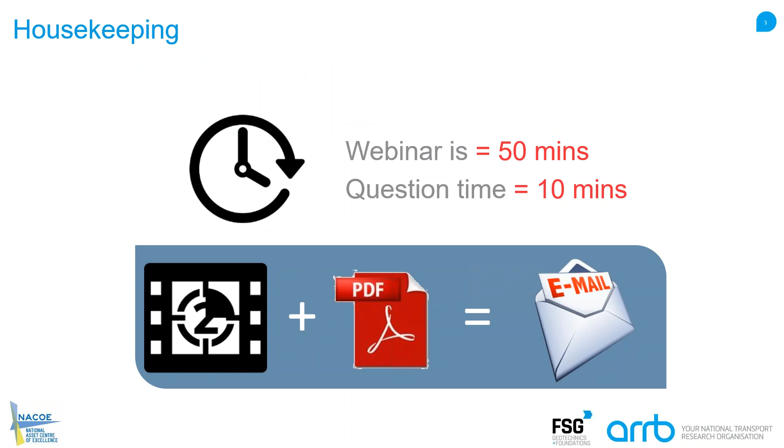Our presenters today are Dr. Jeffrey Lee, Dr. Bert Look, and Dr. David Lacey. Dr. Jeffrey Lee has 18 years engineering experience with a focus on pavement and geotechnical engineering. He is currently a principal pavement engineer at the Australian Road Research Board, responsible for delivering and managing research projects under the National Asset Centre of Excellence, NACOE program.

Dr. Bert Look has 35 years professional engineering experience, with over 32 years specialization in geotechnics. Bert is 2014's Queensland Professional Engineer of the Year, and has published 3 geotechnical engineering books and over 70 technical publications. Dr. David Lacey has degrees in both geophysics and civil engineering. His part-time PhD candidature investigated appropriate testing methods to assess in situ material parameters of residual soil profiles. David was 2016 Engineers Australia Young Professional Engineer of the Year.

So welcome Jeffrey, Bert and David. And before we get started, we wanted to find out about our audience, so I'll launch the poll. Welcome to you all, how are you all? Very well, thank you. Excellent, thank you, great to be here, thanks.

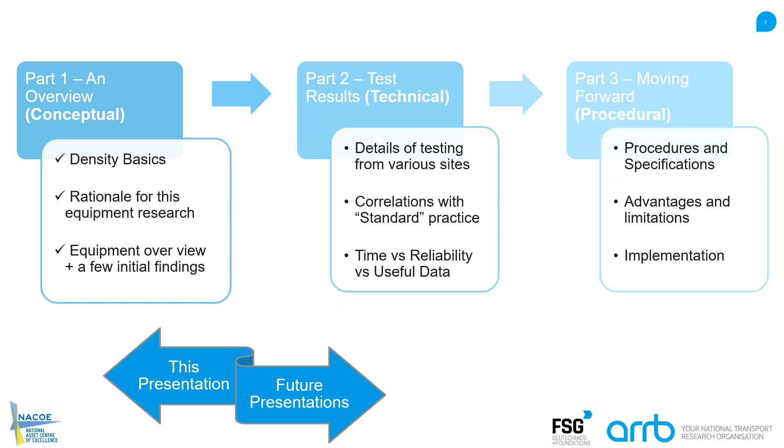This webinar is actually the outcome of one of the projects that I'm leading here, and it's sponsored by the National Asset Centre of Excellence, which is an initiative of the Queensland Department of Transport and Main Roads, as well as ARRB. The title of this project is P60, which is under the pavement discipline area in the research program.

The title is Best Practice in Compaction Quality Assurance for Subgrade Materials. So again, my name is Jeffrey, and I'm Principal Pavement Engineer here at ARRB, together with Siva, who is the TMR project manager on this project, as well as Dr. Bert Look and Dr. David Lacey from Foundation Specialist Group, which we've been working with for the last 2 years.

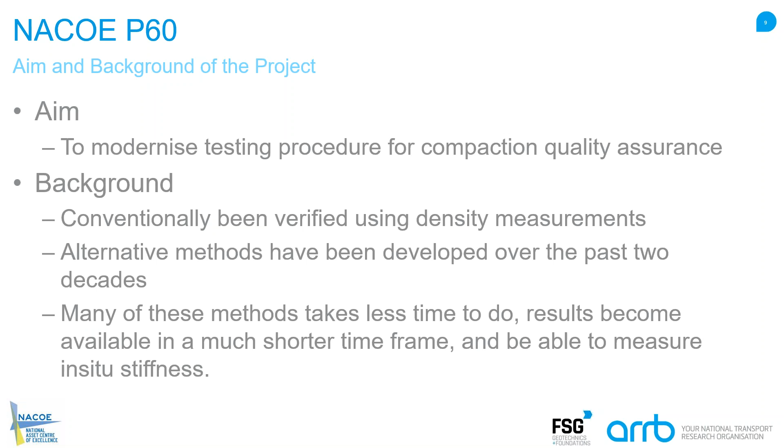Thank you, Jeffrey. Okay, here we go. I guess the first deep and meaningful question of why we do what we do. Why should we be looking at these test methods? After all, we have been going merrily along the road, so to speak, with our density testing. It has worked well, and it has served its purpose. But is it the best practice that we should be focusing on now? Yes, it's been doing a good job, but is this the best approach currently?

And often the question becomes, why do we do what we do? And it's a strange sort of answer: it's because that's the way we do it. We need to be careful with that answer, because times change, the knowledge changes, and the background for lots of things changes. As part of this presentation, I need to get you up to speed on density, the reasons why we do it. It has an interesting background, and it raises a lot of questions of whether that is the best approach with current technology.

Okay, you'll see a few light-hearted slides in between. I guess it's all part of my enjoyment of doing what I do. We've got to just relax a little bit. While it's all technical, hopefully you'll get a bit of fun out of it as well.

So moving on, Jeffrey introduced 4 of these aspects in a summary fashion initially, but what we need to understand now is a bit more on some of these issues. It was mentioned about it being a lag indicator, and that's a key aspect, but why is it a lag indicator? The reason I'll expose shortly, but that's one of the key things, as well as the CBR test, which can also be a lag indicator to some extent.

Now, when a contractor does the pavement, they do it with the best intention and think the result is okay, and often push fill another 2 or 3 layers above that, because the results take a while to come through. And then, if it doesn't come through, the contractual dispute starts. They believe they have done a good job, and you back yourself, because otherwise equipment is on standby, and that could be a significant cost.

But if one finds a result that's not acceptable, to remove that other material and come back down, we are talking about sometimes 25K upwards. 50K wouldn't be unreasonable, depending on how much space you have, whether they use equipment elsewhere, and how many lifts they have pushed up above. So we're talking about significant cost as well as time when we have a lag indicator.

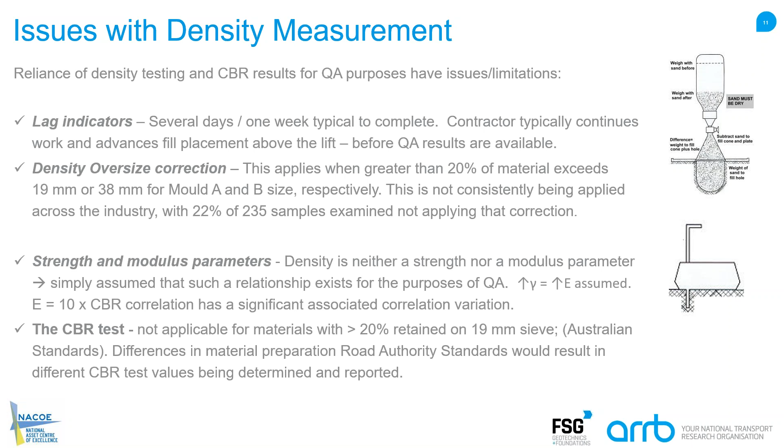To make it more difficult is that we assume density is related to modulus, i.e., we have a high density, therefore we have a high modulus. That's a big assumption. Just keep that in mind, and I will run through that aspect shortly.

Okay, so compaction quality control, we did complete a state of industry in 2017, which provided a bit of a technical aspect to it, and that was completed last year. In this past financial year, we have completed some field trials, and we should be presenting the results of that shortly, hopefully before the end of the year. Jeffrey's nodding, so look out for part 2 of that. And the 2017 summary is complete. From a technical point of view, you may wish to add something to that, Jeffrey.

What about from an information reporting point of view? So in 2017, we did a comprehensive literature review, and it should be up on the NACOE website, the web link that I showed earlier. So make sure you go and check it out often. A lot of the descriptions of test results and everything are critiqued and described in that literature review. So a lot more information on what's presented in this presentation is in that literature review.

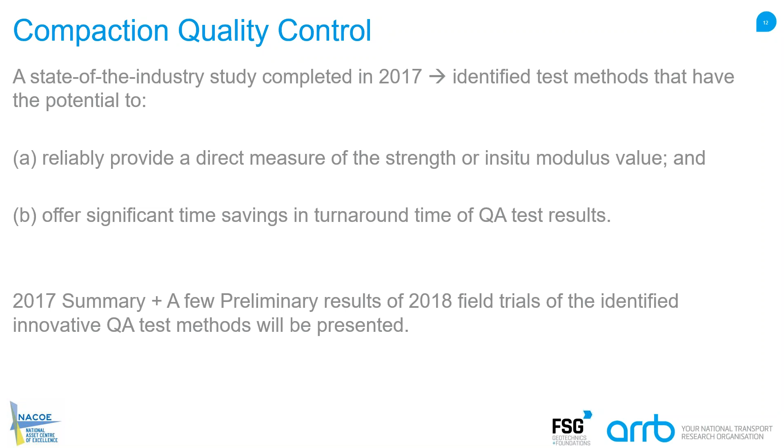Yes, so we are trying to present a 100-page report, David, would you say? Plus, in literally just about 30 or 40 slides. And in fact, even last week, we cut out quite a bit of slides to match the time. So keep that in mind. There's a lot more information there. This is just a summary. Okay, I've got to push on.

Now, let's go with the basics. And I'm assuming most people are comfortable with density testing. You've done a bit of that. But what we find is that a lot of things get mixed up in our standards and of why we do what we do. And we have density as one of the parameters, and they're embedded in that specification, whether it's a main road standard, a local standard, whatever. You might see lift thicknesses and moisture contents as part of that standard.

The lift thickness is actually a recommendation, and so is the moisture content, and that gets confused about needing all three simultaneously. They're not in the same basket of requirement of what one must do from what is recommended you do to get the job done better. I.e., if you have a certain moisture content range, it may help the compaction and certainly get you there faster. It doesn't mean if you're a bit off, that's a failure.

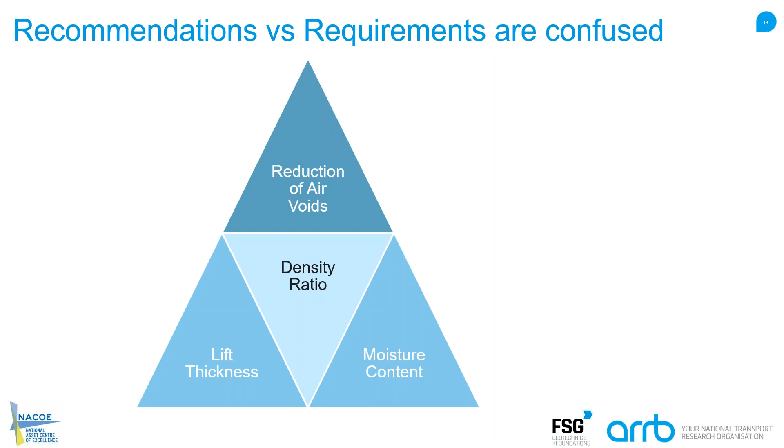And in fact, even when we look at the density ratio, is that what we're after? No, actually we're after the reduction of air voids, which is the top of that other triangle there. So having summarized what we are trying to achieve for compaction, we might say compaction air voids leads to density ratio, and we have supporting acts with moisture ratio, which could be climate dependent. In fact, it is.

Your OMC is close to the EMC, which is more important, only for certain levels of rainfall, somewhere between 500 to 1,000 mils, which just happened to be the rainfall that Proctor had in California when he came up with his test, coincidentally, but it doesn't apply to most of Australia. So we need to be careful there. In very wet climates or very arid climates, a different equation can develop of what is required.

It's similar for layer thickness, which can be equipment dependent. One cannot judge layer thickness by using a 100-kilogram plate compactor versus a 20-ton roller. Obviously, a different thickness should apply, but that doesn't often become a considered part. We need to be careful there. So again, having the supporting acts, we have our density ratio, our focus.

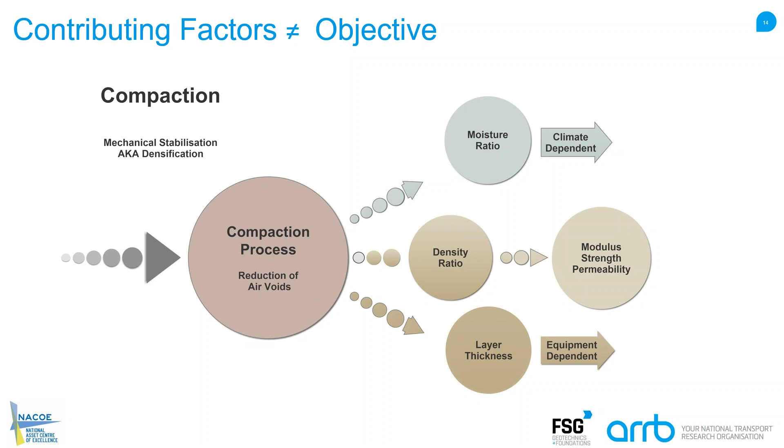Is that our focus? And the answer is no. Actually, there's a relationship there. We assume if we get the correct density ratio, that we have the correct modulus, strength, or permeability as three key parameters of design. There is not a direct relationship, and I'll just illustrate that shortly.

So pushing on, let's just take a step back to history, not history for history's sake, because it is important we understand a bit of history and give acknowledgement to the great forefathers, etc. But in fact, by understanding that historical perspective, we can appreciate why we do what we do. It's not often we make a forward step as well, so we just need to be careful that we aren't crossing the optimal line, so to speak.

Okay? So let's just take a step back to the 1960s, when the Highway Research Board, as it was called then, the American one, now called the Transportation Research Board. Typically, if you read any of those papers, a typical output was 100 cubic meters per hour, and with a 10-ton roller you were king of the roost, so to speak. By the time we reached 1980, 15-ton was probably it, and in the 21st century we operate 20-ton rollers; 25-ton rollers are pretty normal for the large jobs.

But yet when we look at the QA side of it, where 200 mil lift thickness was appropriate for a certain type of roller and a certain condition or production rate, we still use it, even though a lot of other factors are changing. So it begs the question, should we be making a change as well, a comparable change?

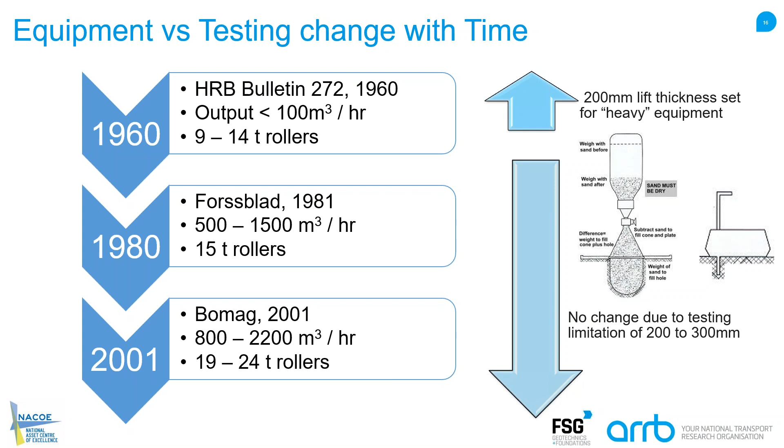And are we able to QA it in terms of either lift thicknesses or even the parameters we are looking at? So let's just move forward on that concept. And I'll give you a bit of history.

You'll see, obviously, this is scanned from the papers back in the 1967 Highway Research Board. You can check that reference for yourself, but you can sort of see how they were thinking back in the day, so to speak, where wet density, the one in blue, and the dry density had a very low variation. They call it range over average. Now we'd have to use the coefficient of variation, but let's just run with what they have, which is not dissimilar. It had the smallest range as compared to the CBRs or the plate loads, which are very huge numbers.

So precision, underline that word, remember that word, I'm going to repeat it. Precision was a very important considered factor. There's a big difference between precision and accuracy. You need to understand that. They are not the same. So precision is what was a defining factor for the forefathers, so to speak, who brought this to our understanding and how we should QA things. It had a very good precision in terms of repeatability, reproducibility. Those are the factors we are talking about here.

Now look at table 3, which considered combining factors, because these are the considerations that do help us to understand density or improvement from compacted soil: moisture content, lift thickness, soil type, compactive effort, and compaction equipment. Now, when we look at combining some of these things, such as, for instance, compactive effort, TC, we see none of the tests are represented there. And that's because the variation became very large.

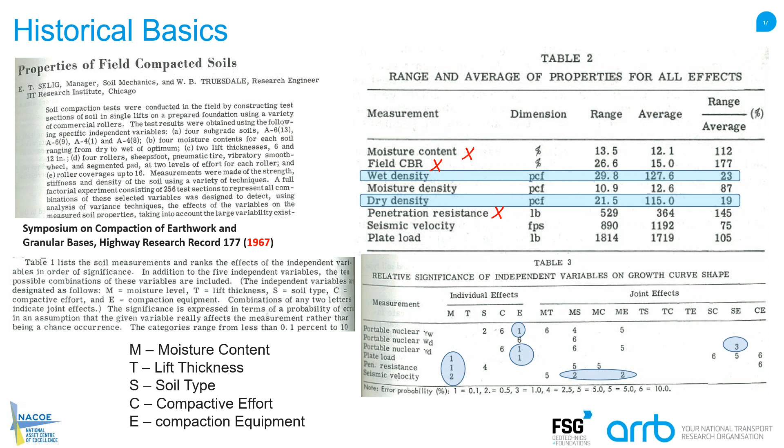So that's, I guess, a key summary of the history of it. And I'll leave it at that, so hopefully you understand precision, why it's there, and that's the key factor moving forward. Now, I'm just grabbing something out of BOMAG's 2001.

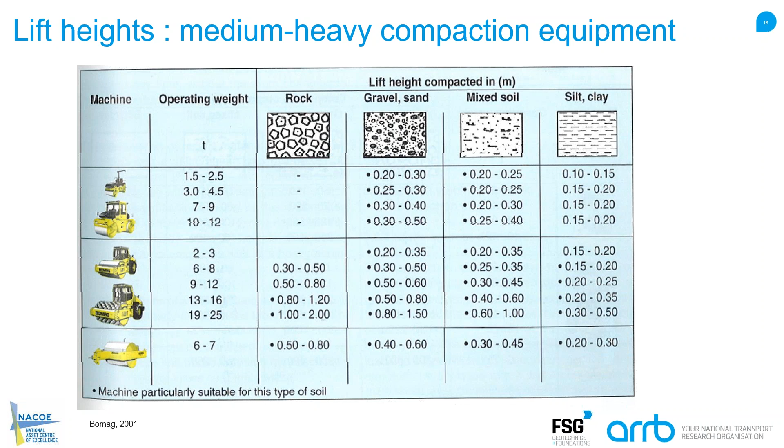So let's just introduce one other concept through this time history, of where we started with standard Proctor back in the 1930s. In the 1940s, there was another QA system, which was the modified compaction test by the US Corps of Engineers, because they were using heavier equipment, which was 10 tons, by the way. And then by the 1970s, it moved to 20 tons, and of course, we do 25 tons by the 2000s.

And if you look at the red vibratory rollers, it's important to understand that a 20-ton can actually induce the equivalent of 35 to 40 tons of impact force when you're in vibratory mode, depending on the amplitude. So we should not just judge it by the static weight; the actual compactive force is probably much more meaningful when you're into vibratory rollers. Separate consideration, but the other consideration is about the modified.

You notice in the 1970s, when the weight doubled, it wasn't a Rev 2 or Rev 3, and we haven't moved to Rev 5, Rev 6, or iPhone 10, or whatever it is you want to call it. We all like the latest and greatest. So for those believers who think modified is the latest and greatest, well, I think you're a bit out of date, because that's 1940s stuff. It cannot be the latest and greatest. So don't think because modified is more up to date that it's current. There's a difference between more up to date, 1940s, to being current.

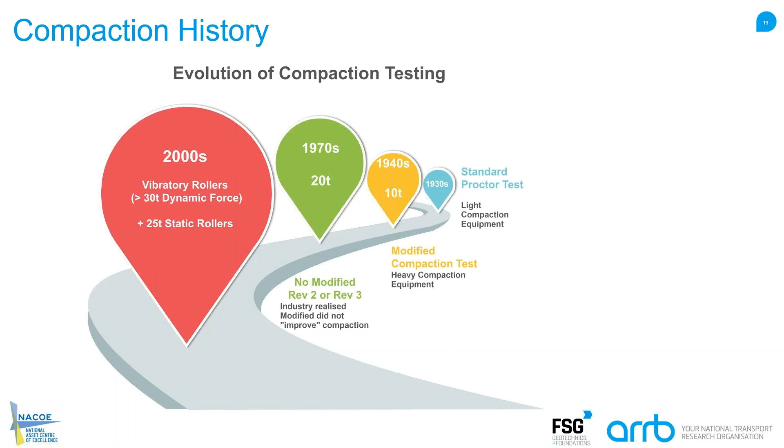And have you had an added benefit? The answer was no. And so it didn't try to do a modified modified, which is where we should be if it was relevant. But back in the 1970s, it was realized that the original reason for the 1940s modification didn't actually hold, because it was just a different unit. You didn't change the level of compaction in the field. You simply introduced another unit of measurement. That's the point that's being made here. Okay, so we will push on.

A bit of history here, a summary of the density testing, and thanks to Mick Morrison from Morrison Geotech who gave me some background data, and I just made it a little sexier, you might say, in terms of a nice diagram. Basically, this is the data of how long one takes to do something. 20 to 30 minutes, depending on the size of sand replacement you're doing. Yes, you can report it in 15 minutes. It doesn't consider overhead time of preparing your sand container or your equipment and your travel time. This is simply the minimum time required, assuming you don't have to wait and have inductions, etc.

But in the background, in the lower part of it, you have got to take some samples for your MDD and the minimum curing time. That middle one is a killer. It's not only a killer, it's a murderer. Should be charged with a lot of things. Because it's what kills a project, because it means there's a long wait time if you were to conform to Australian standards. Then after you cure it, you do your MDD, which may take 50 minutes. So it may take 1 3/4 hours roughly in total time to do the test, again excluding overhead time.

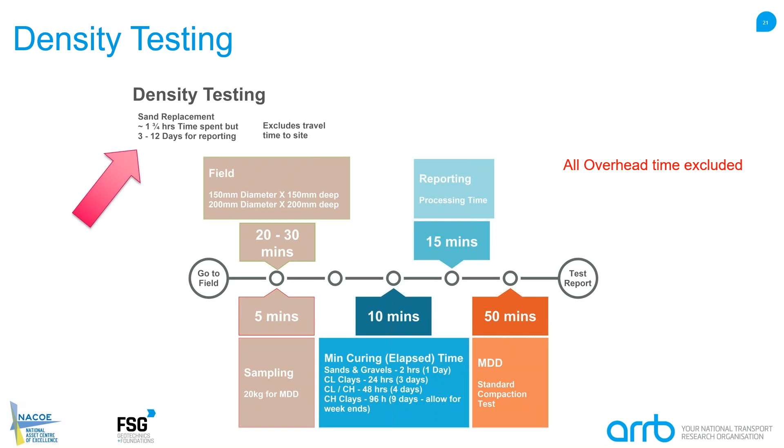However, 3 to 12 days. My gosh, people ask for things after 1 day or 2 days. That's not acceptable in this current push for time delivery. So, understandably, the average contractors keep on pushing dirt up and assume they have done a good job because they think they have done a good job. Even the QA may lag a lot of times. So that's where we're at, our state of practice.

If we think about that curing time, let me step you through what is required for the main road standard, that's called Q113A for CBR, where you have to prepare a sample, no different from the compaction. There's the RMS T132, and the Australian standard. There's a subtle difference between all three, but basically we have a standard to work towards, assuming NATA registration and that people are doing it similarly.

And yet, we come to the question about repeatability and reproducibility, etc. The CBR is notorious for not being repeatable and reproducible. Just keep that in mind. In fact...

Rawlings, in an Australian Geomechanics Journal paper back in 2014, showed that when he sent samples out to 50 different labs across Australia, what he found is that less than 60% of results were even within plus or minus 30% of the CBR values. Think about it - if you have a CBR of 10%, pick any number between 13 and 7, and at least 40% of results will be outside of that range. That's not good reproducibility and repeatability, and it comes down to some extent, or a lot of it, to that curing time, and in fact that sizing.

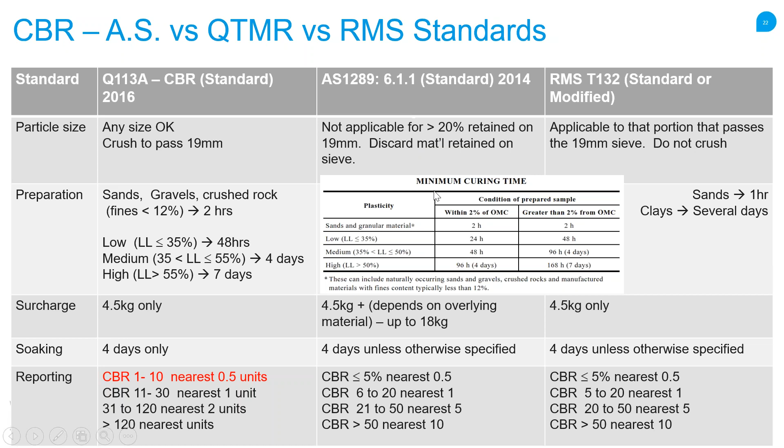I'll touch on that curing time with the next slide, and I'll come to the sizing in the slide after. So if we do not do that curing time, this is an illustration of what could happen.

If you only cure it for 1 day versus the 7 days or 4 days plus as required, you can have a shift of density by 10% plus, as you notice. Moisture content would shift by another 2 or 3%. So it's essential that we keep that curing time, and it is all part of the delay in the reporting phase of trying to find that MDD to get our density ratio. Very, very important, as you notice - this is an illustration. If you don't cure it, you can't fast track it. You will get a different result.

Now we come to part of the equation about the use of the size required, which is required by all these different standards, including the Australian standard. But as you notice, Queensland Main Roads is treated slightly differently from RMS, which has a slight variation of treatment to the Australian standard, with that percentage crossing the 19 mils. And remember I said 22% of results I surveyed actually didn't conform to either how you should use it or how you should correct for density.

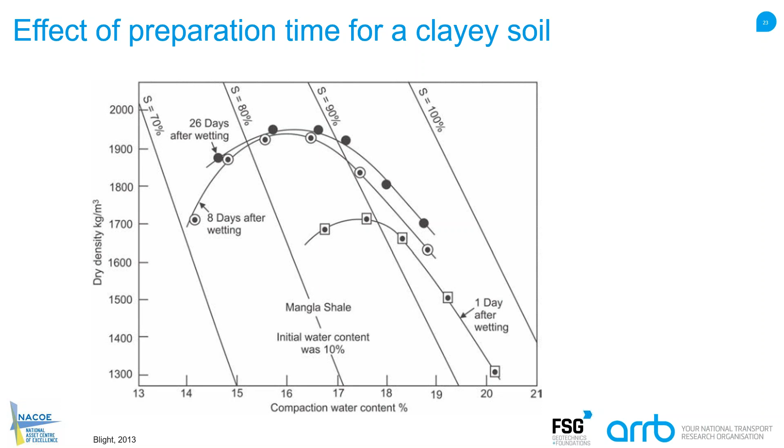This is an illustration of what happens - a colleague here, Dave Lacey, and Dave Marks from Queensland Main Roads, when we looked at some results for C2C, that's Cooroy to Curra, up north in Sunshine Coast. There was generally a residual soil profile, XW rock. What happens when you use a soaked CBR? You literally saturate at a certain value - no pun intended, it's a soaked CBR. But you reach a value which plateaus, and you'd think if you have a rock, it should be a better CBR. Well, it doesn't matter how good the rock is, and whether you're using a rock breaker to get the rock out, you are going to be stuck with a CBR.

Imagine that - you have a material which you're having trouble to excavate, and you have a low CBR. That's because the test gets rid of this arguably strong material, the material above the 19 mils. So when we are in residual soil, which has a lot of stony bits, the top line shows what you should be getting and what we tested in the field, while the other line shows what we end up getting in the lab. Arguably one may say it's a soak value, but when you come to material with high stone content, soaking doesn't make too much of a difference when you have a lot of gravels and high stone content. Whether you wet it or don't wet it, for that high percentage, it's not going to be significantly different. Yet it is significantly different. So we are not availing ourselves of the strength of the material in situ, and in fact, the lab result is holding us back.

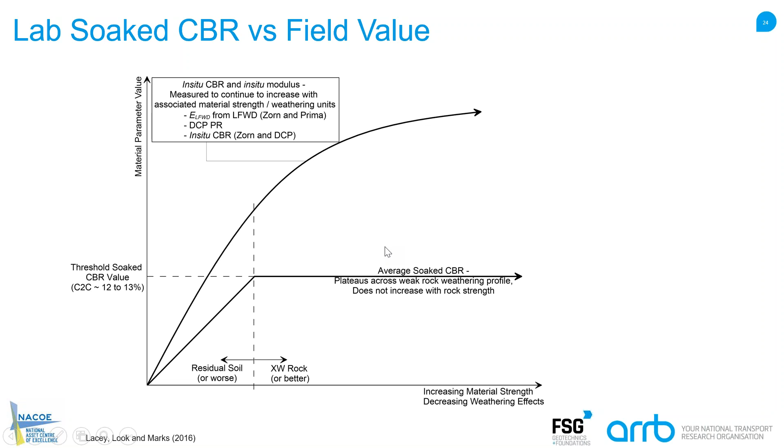Let's move on. Okay, so any questions so far, Rosemary, that could be present?

Thank you, we've just had two comments. Mick, it's interesting that you're stressing the importance of adhering to curing time, and Mick made a comment that not many, if any, labs will adhere to curing times for compaction tests. So do you think that might change now they've heard your story?

I hope, but the answer is no. You had a colleague long ago, and there's a difference between reality and what we aspire to, and we've got to make that difference too. There's something like commercial or time pressure or project management push. I remember one colleague in a lab, he says, you engineers seem not to understand some of the basics - this was a testing person - he says, do you know how long a 4-day soak CBR takes? And I said, yeah, minimum 4 days. He said, yes, so why do people want it the day after? It's called a 4-day soak CBR, for goodness sake. So when engineers don't understand those basics, I live in hope.

But no, the standard says it has to be done and it should be adhered to. And if people are not doing the right thing, they are not registered. We expect people to do the right things, but no, sometimes the ideal isn't always adhered to, and I'm very uneasy - I do get results in record time, and I'm uneasy about those results, and people should always question results when they get them too quickly. So Mick, thanks for that. People should be doing it, but the lab should at least be advising that they need extra money to possibly do a correction factor, things like that, but it's not happening as a standard across industry. We need to understand the reality of results, whether it's representative or whether we should be using it.

So let's talk about some alternative testing equipment. The literature survey showed some of the equipment we'll illustrate shortly, whether it was Pandas or LFWDs - the different brand names mentioned - or borehole shear tests, BHST, where they should be used. I'll give you a look at the next slide showing how we receive those percentages, but what you will see is they are significantly above the nuclear density and sand replacement methods in terms of the percentages, meaning it should be higher in usage, but it is not, and that's because we are locked into our practice of density. So while density has served us well, is it now keeping us back from using other technology, which has been around for at least 20 years, so it's not current - it's been around for a while, it's well established.

Germany, for instance, uses the light falling weight deflectometer without having to use densities and other things. So there are places that have moved away from those methods. And DCP, which is much valued—I'm saying it's good, but it doesn't have the resolution required in some cases—yet you notice 58%, and it's still a much used strength for assessment.

So what we're trying to do in this research is get those greens and those low ones up, to provide confidence that we should be using it. Sorry, just taking a step back—we're trying to evaluate the use of largely modulus tools meant to directly measure modulus for QA of materials, rather than relying on density like we were talking about before. Yes, that's the overall aim of this.

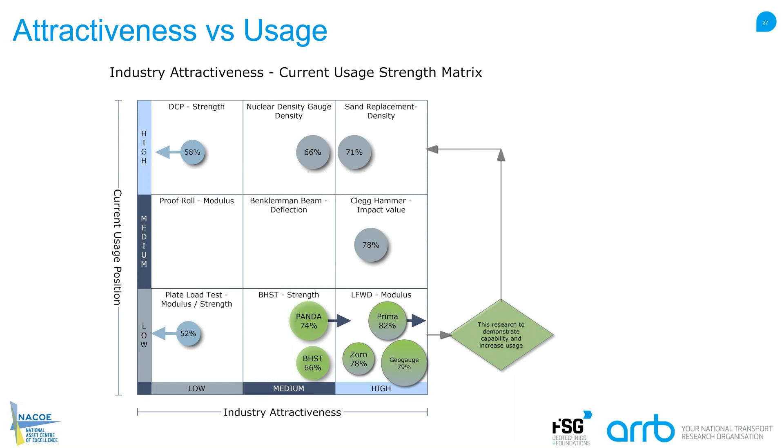That's right, and that's a different unit of measurement, which may have some people uncomfortable. These are the aspects under which we came up with that. Now, we can argue about whether we should use these percentages and whether principal costs may govern. That could have gone higher, but you'll find that the percentages we have would have only changed by a minor amount, and it would not have changed the base consideration that we need to consider other equipment outside of density and our nuclear gauge. So that's subject to discussion in those rankings, but let's move on.

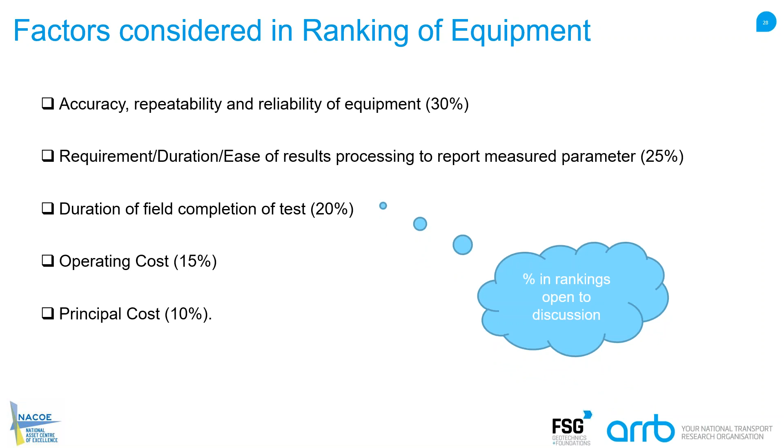That was certainly the basis of how that literature survey was completed last year. So we have traditional versus 21st century, and keep in mind we've been in the 21st century for 20 years. So what we're doing is not actually new, it's simply trying to bring us into the year 2000.

But the issue with some of these is they're not standardized, at least with density, CBRs, DCPs we have a standard in place. There's a lack of standards with some of this new equipment, or rather they are driven by the equipment manufacturers themselves. So that's possibly part of it.

I've mentioned that modulus and strength, while not considered 50 years ago—and I showed you that reference paper—how it was considered very good, but it did not have the technology back in the 1960s. That's the reason why the technology wasn't there. Now we have the technology, it is open for reconsideration. We need to constantly reevaluate, are we in the best practice mode?

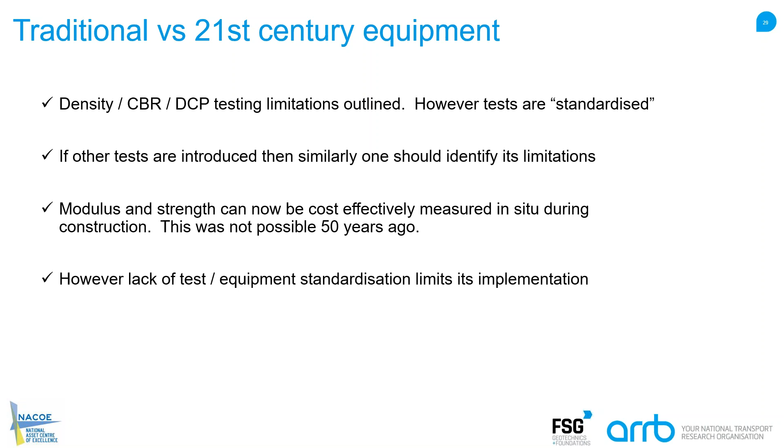Accepting that we need to also consider standards, what we've done is evaluate a range of equipment. There can be others added, but this gives you a flavor of some that we considered, or tried to consider. The base ones, in green, are the reference tests you might say for CBRs or density testing. We also do plate load and Benkelman beam testing, typically as current standard practice, not as often, but we do those.

And the ones at the bottom, which are available quality control technology, is where we are trying to focus on some of these technologies. How reliable are they? How accurate are they? That's what we're trying to do.

There is something, intelligent compaction, which is not part of this talk—that's contractor driven. There was a workshop here back in early May. But that's contractor driven, and it's saying, do we accept the word of the contractor? Obviously not. So we can focus on the others where we can do our own independent measurements. It doesn't detract from the fact that intelligent compaction is a very, very useful tool as well moving forward.

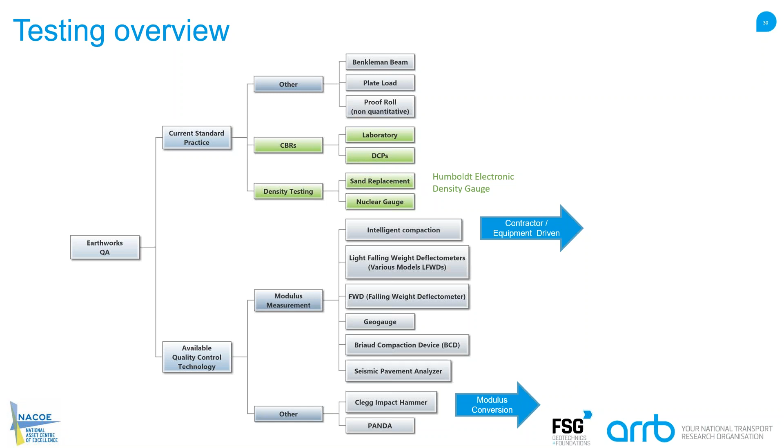Okay, and then even though we have Clegg impact hammers or non-modulus measurement, you can convert as well through an equation—much better than some of the CBR, some modulus conversion, or a density to modulus inference, which is quite different. In so doing, we have correlations. Keep in mind, there's always scatter of results. And when we correlate something, we're trying to reference back to what we're accustomed to, such as density or CBRs. We need to be careful there about what that correlation actually means.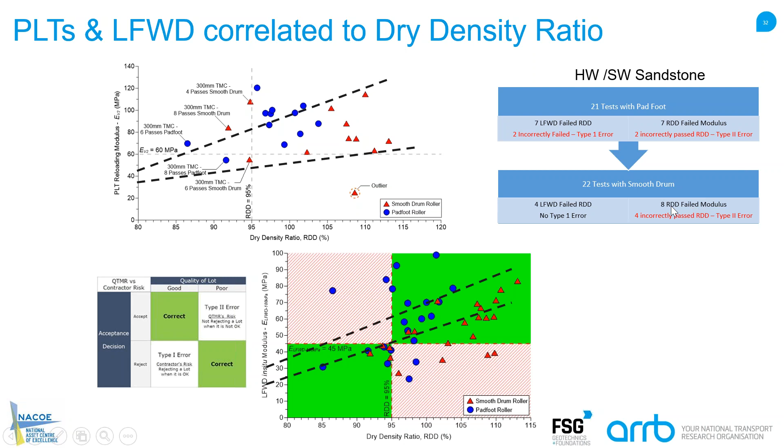So we're seeing different tests giving us different results. When we try to correlate things, it's not a one-to-one relationship. We need to be careful of what that correlation means. And if we look above on the right now, this was with a pad foot roller, we saw that there was a balanced type 1 and type 2 error. And then when we look at the other one with the smooth drum, it was an imbalance. So in other words, depending on whether you use a pad foot or smooth drum roller, you could actually have a different inference of what was good, what's called type 1 and type 2 errors. So we just need to be careful on correlating something to the past. A point I'm trying to make here, because legacy issues may hinder proper use and benefits.

I was in the UK last year, went to the grocery to get some milk. And then I saw, how does one get a 500 mil? No, you can't. You get 568 mil. That's crazy, isn't it? Because that's not getting the benefit of a metric unit. If you say you want a 568 mil, they're locked into a legacy issue of calling it a 1 pint, or 2.27 liters. I mean, who goes to a grocery and gets 2.27 liters? If that's what you think metric is all about, you haven't moved on and you're stuck in a legacy issue here on metrication. So hopefully you understand my point about correlation and holding on to something from the past. We could actually hinder ourselves from moving forward, because this clearly wasn't moving forward, even though this is a metric country. So hopefully the point about correlations is understood.

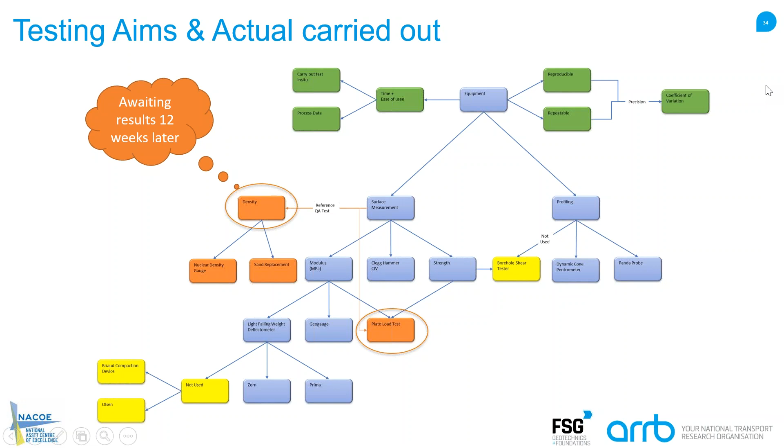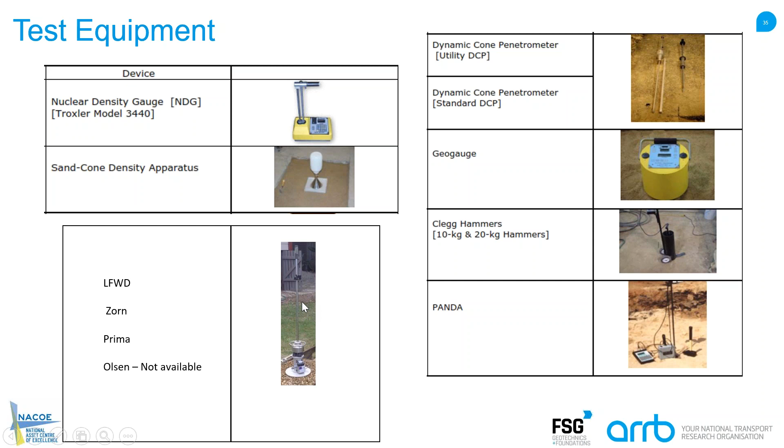So that's a reference for correlation. We want to correlate things back to density and also the plate load tests, considered to be the gold standards. The ones in yellow show we intended to use the equipment, but for various reasons we couldn't get it in time, so we did not use those. But we did use various other equipment here, such as the 2 different LFWDs, a Zorn and a Prima. We did try to get an Olsen, but it wasn't available. We used a Panda, a GeoGauge, Clegg hammers, plate load test as well, which is not shown here. So these are some of the equipment, and Jeffrey will give you a quick summary on that shortly.

But part of the equation is understanding what is the zone of influence. Density measures to within 200 or 300 mil, and so does the nuclear gauge. But these other instruments are actually measuring a different zone. So the correlation is not going to be one-to-one for this very reason as well.

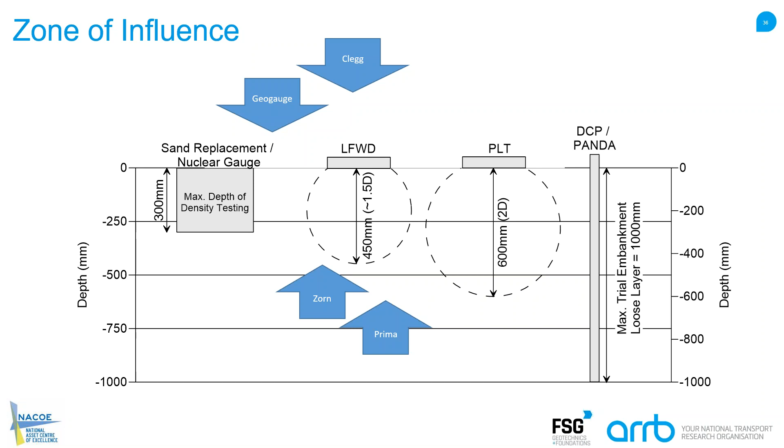Each equipment has a different reference zone of its influence depth. Certainly the DCPs and the Pandas can go to whatever depth if we can get it through. But the surface-based equipment is measuring something with a different zone of influence. So hold that thought in your mind while Jeffrey runs through quickly some of these details of the equipment.

Okay, thanks, Bert. I'll give Bert a little bit of a break. Yes, I'm having my drink of water.

So here's a slide about the different equipment that Bert just talked about, so it brings everyone in the audience to the same place. I'll do this rather quickly. So DCP, dynamic cone penetrometer, as mentioned, there's high utilization in the industry, and it's a low-cost penetration tool, and I think one of the reasons is because of the simplicity and the low cost. And again, it's an index test to correlate with CBR and other material parameters.

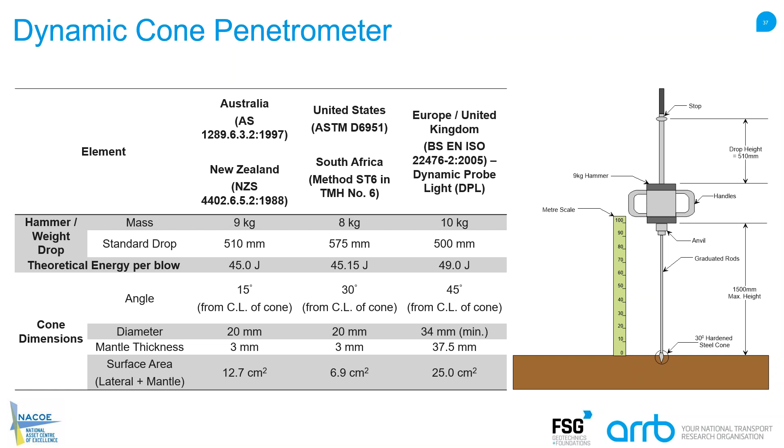As shown in the slide, there are a couple of standards, and they have slightly different drop weights as well as cone tip angles. And we got the Panda, which to me is an electronic version of DCP. Rather than using a drop weight, an operator actually strikes the hammer on the plate, and after each blow, it measures the penetration of the rod, the energy imparted, as well as the cone tip resistance. Similar to DCP, it is also an index test, and I had a trial of that in the field. The hammer striking the plate is not that easy to hit in my book, but it's just me.

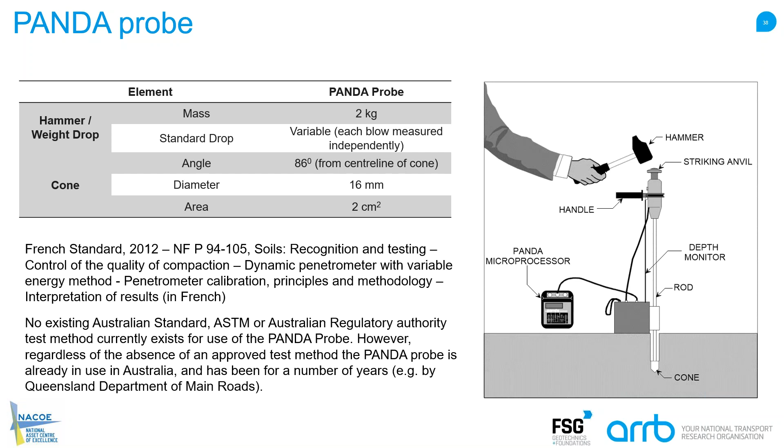And then we got the plate load test. The static plate load test has been around for a long time, as presented in an earlier slide, and it's often used as a reference test to measure deformation and modulus. There are quite a few applicable standards, like ASTM and the German standards as well. And based on the results from the loading and unloading cycle, we can get quite a number of material parameters as listed in the slide here.

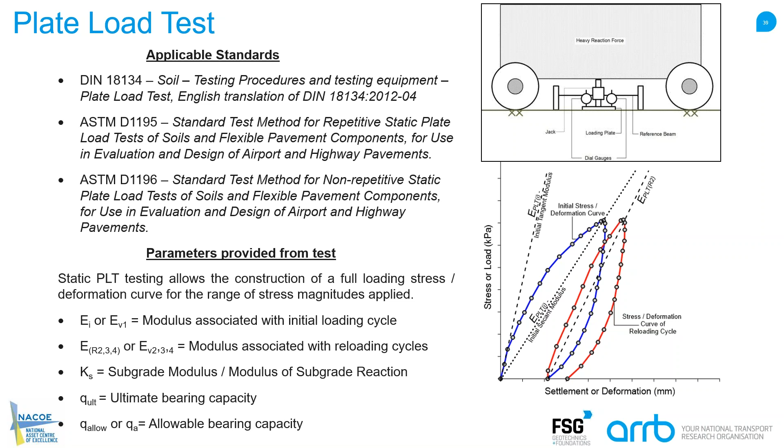One of the biggest issues with LFWD is that the different manufacturers, the different locations of the geophone, the presence of a load cell, or the way they measure the deflection means the modulus parameter provided after you drop it onto the ground is different for each brand or manufacturer. That has implications and problems when you write a specification stating you need to achieve a modulus threshold for passing, and then a different brand is utilised in the field. So you just need to specify that when you're using it in the field.

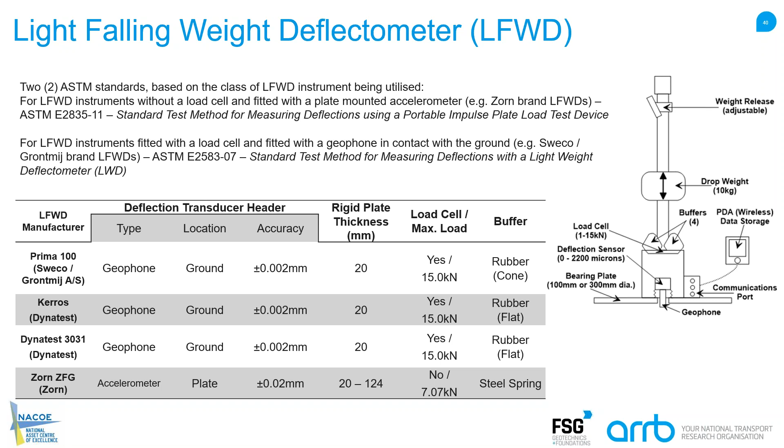Thanks, David. And I get asked a lot, is FWD the same as the light FWD? And the answer is no. Even though both of them use a drop weight, the pressure imparted on the ground, the number of sensors and other things differ, so the two equipment have their special place. I'll just leave it at that.

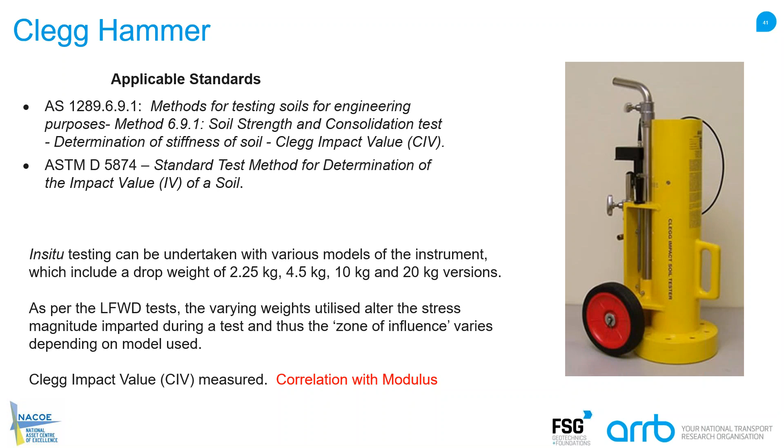And we got the Clegg hammer. It's really a simple device. Again, we got an Australian standard and an ASTM standard for that. By dropping the weight at a set height, you basically measure the deceleration rate from a high precision accelerometer, and from that you get the Clegg impact value, and there's some correlation to convert to modulus as well.

And then lastly, there's the GeoGauge. It's basically a surface-based plate stress test. When you place the device on top of the soil, at the click of a button, there's a 25-step steady state frequency program. It's sweeping through a range of frequencies, and the stiffness is measured based on the average of those 25 frequencies. If you want to learn more, there's an ASTM standard, and tons of applications you can find. All these equipment are fully detailed in the literature review we completed last year, available for download off the NACOE website. Yes, so go to the website again.

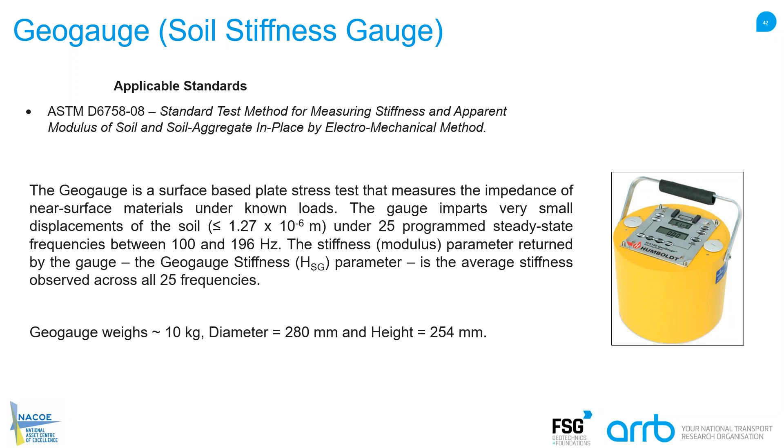Okay, so what we did as a quick summary, because we will present the results in the next webinar, but you'll see the equipment's being used on a live site here. The far left, you see the LFWD and somebody using the Panda in the background. The plate load test is being done with the roller in the far background, and in the middle you see the GeoGauge and the plate load test, and

What do you call a lot of equipment together? Is there such a word? A flock of equipment? The group photo.

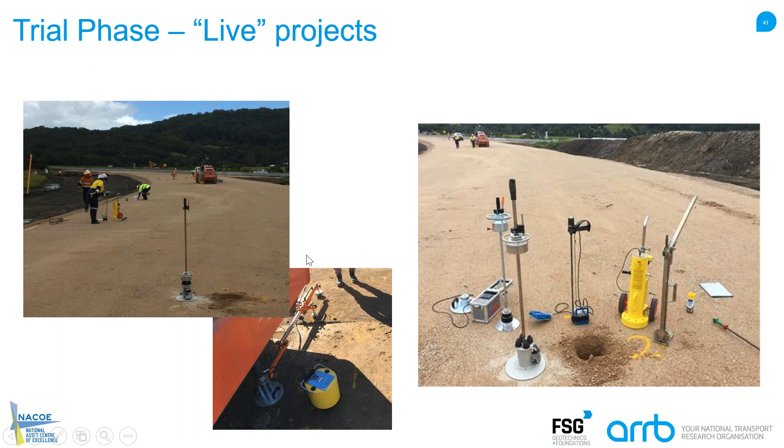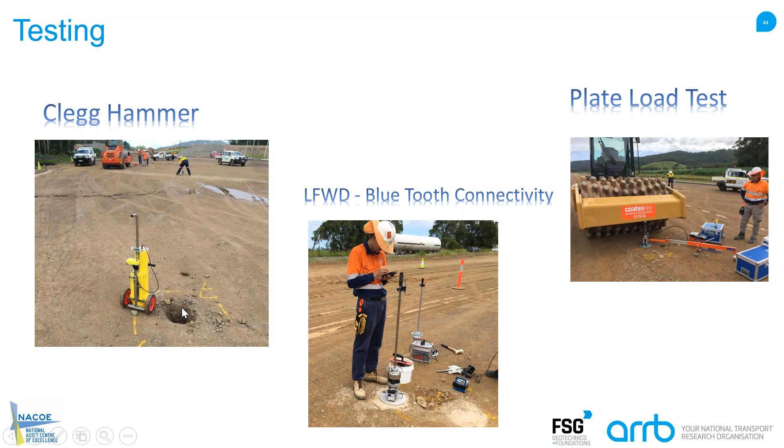A group photo, right. So here we have different equipment being done next to the density testing, whether it's the LFWD, Clegg hammer, or plate load. So this is what was done in the past few months. We will present the results of that shortly. And this is how we are processing the results, trying to compare, in this case, the Clegg hammer with different drop heights and the coefficient of variation spread.

In this case, the far left is 32%, far right coefficient of variation 25%. That's coefficient of variation, by the way, standard deviation divided by mean. That gives you an idea of the spread of results. That's all to do with precision. How is it repeatable and reproducible? That's not accuracy yet. That is a different factor. So we are trying to understand the precision, because density has a good precision, and trying to make that comparison.

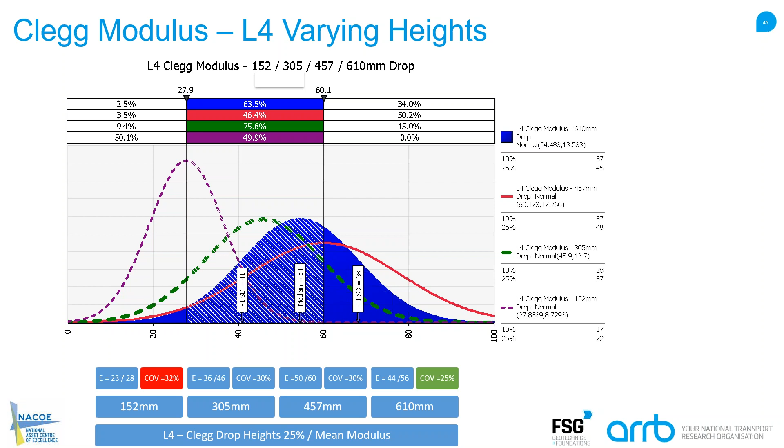So I'll jump straight to the last technical slide, and this provides a summary. It's still a work in progress, and things may move up one or two places. But if we go to the far right, based on time only, we can do an LFWD Zorn in 1/10 the time as a sand replacement. That's not reported time, which will take longer for the sand replacement. A GeoGauge 1.3T, and what you'll notice is basically most of these tests can be done in a quarter of the time you can do the sand replacement. So certainly in terms of time, there's a reason why we should do it or look into it.

In terms of precision, yes, remember the sand replacement nuclear density is one of the best precisions. Are the others as precise? The answer is no, meaning that we are grading downwards, and the plate load test, which arguably is another gold standard, is actually not that precise. Very variable, very accurate, but not very precise. And we'll come to that discussion quite separately.

Now, the amount of data you're acquiring, actually the sand replacement nuclear density provides the least data as compared to the plate load, which provides the maximum data. So it depends on which criteria we are chasing. We could come up with a different reason for using some of these tests. And in terms of accuracy, as I said, we waited a long while. We have the results now. We are trying to cross-correlate, which has its own issue, with density.

But overall, using, again, the plate load test as the #1 accuracy, even though it's the lowest precision, we start to see a different range of how these things are performing. And the DCP, one of our most treasured tools, the 0 to 100, very bad in accuracy. You shouldn't have to use it at all. Its accuracy only improves when you reach the 100, 200 mils, and you'll see how the other equipment are panning out. So without going through the nuts and bolts of how we arrive there, I've just tried to give you a summary, because the nuts and bolts will follow in the next seminar in the next few months, which Jeffrey might confirm.

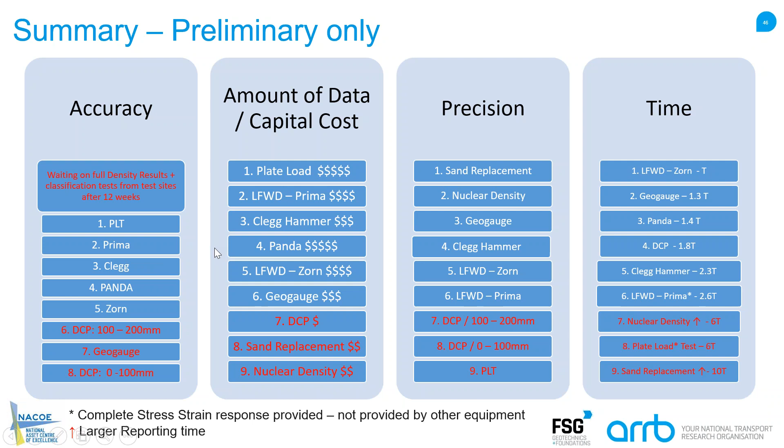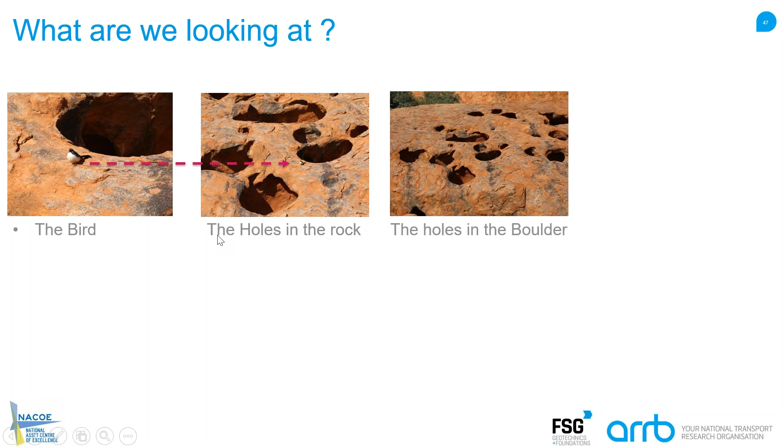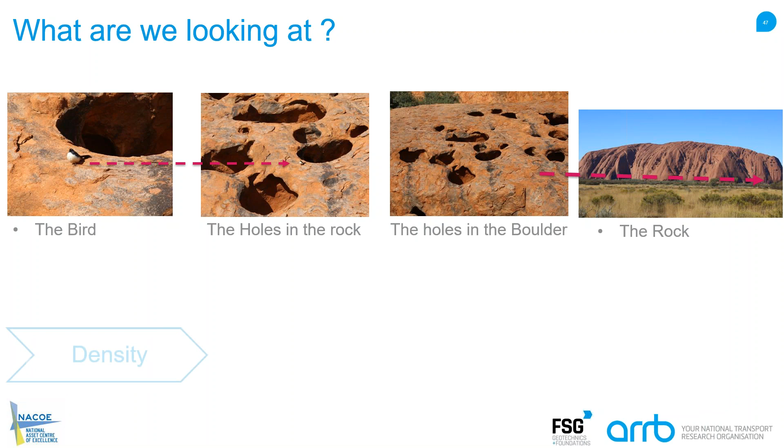And so I guess as a quick overview, sometimes we need to be careful of what we are looking at. Are we looking at the bird, so to speak, or the bird next to the holes in the rock? Or maybe we should be looking at the boulder, the holes in the boulder. Or maybe we should be seeing something else. Just be careful on what density means, because are we really after density? And the answer is no. Of course, it's the density ratio, but are we really after that? No, it's a reduced void ratio. Are we really after that?

No, actually, we're after strength and modulus. So people could get confused about density being the end game. It's not. It's a means to an end, and we need to sometimes understand that, because we have the technology currently to get to the end game without the intermediates in between.